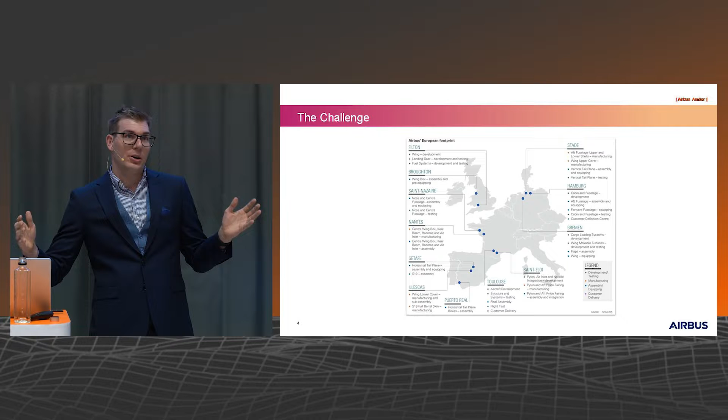Now, I really want to set some of the context for how large the scale of Airbus is. I don't actually know how many factories and plants we have, but I think it's about 40 to 50 all over the world, focused in Europe. I think we also have one for helicopters in Romania.

So the A320 is our most popular aircraft. On a typical month, we make something like 50 to 60 of these aircraft, and we ship all the parts around to our final assembly lines, one in the US. There's two in Europe, one in Toulouse, France, and one in Hamburg, and there's another one in Tianjin in China. And all of the parts for the aircraft are flown around.

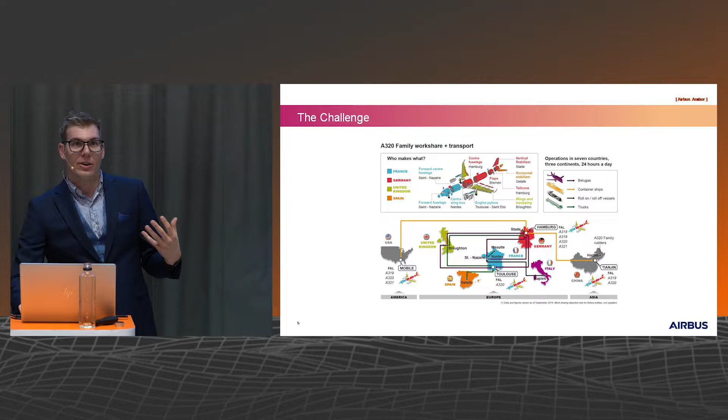The larger parts actually are so large they have to be flown around in a specialised fleet of aircraft. We have 6 of these Beluga aircraft, which are specially designed, specially modified aircraft made by Airbus for Airbus to transport the fuselage, the wings, the other components of the aircraft around Europe from, I think, 10 or 11 different places they fly.

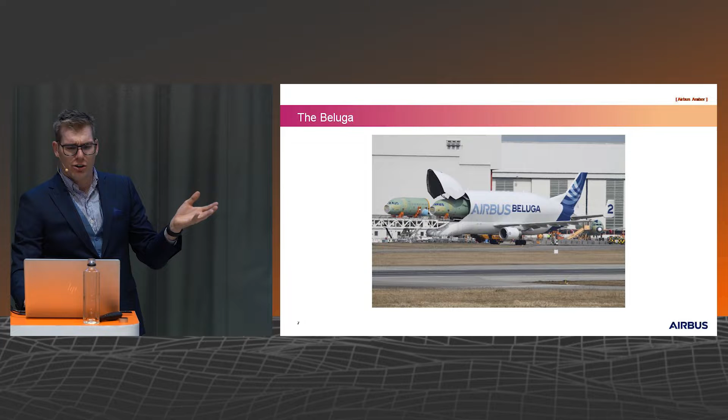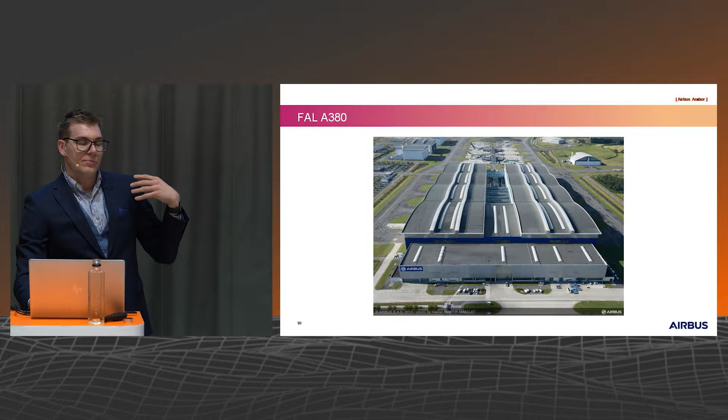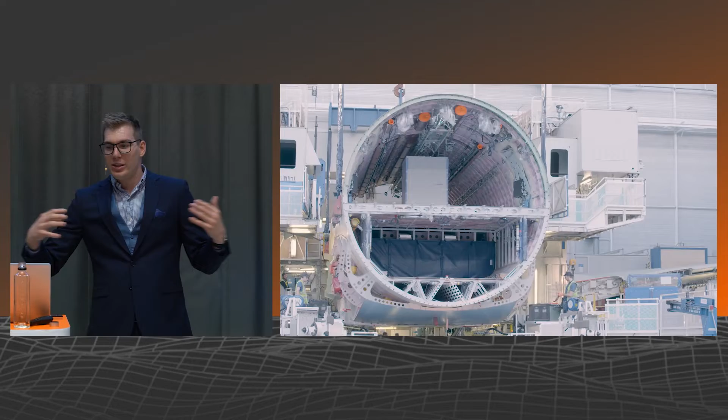So if I can get this video to play, I'll quickly narrate it to explain what's happening. Building a commercial aircraft is actually a lot like building an IKEA set, like a bookshelf, where you've got all these different parts, you have to unpack them all, you have to bring them all together, and hopefully in the right order in the case of IKEA, but definitely in the right order in the case of a commercial airliner. Trust me, you don't want to have parts left over, that's generally not very good.

Bring them all together and assemble the fuselage, which you can see here, but really this is the last 10% of how you build an aircraft, where all of the parts are coming together. And many of the parts we actually make within Airbus. So just pausing it here, because that's the end of the interesting stuff.

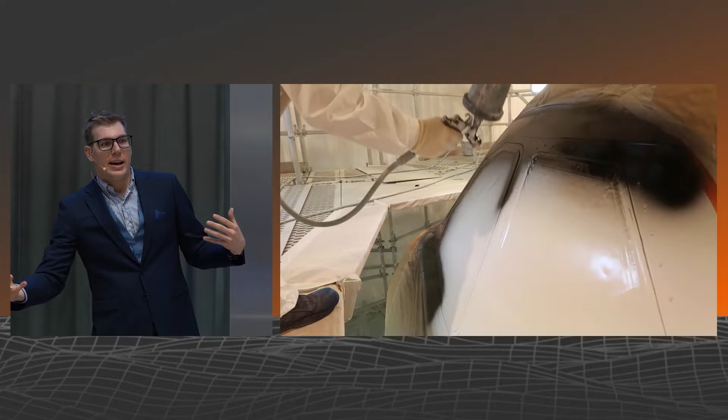Really, Airbus is a huge challenge. The last time I was in Romania was for Codiax in 2019, and this was before COVID, which was a very different world. And the challenge that Airbus had then was how quickly could we make aircraft. There's a huge demand from our customers for the aircraft we make, and we couldn't make these aircraft fast enough. COVID's happened, we're in a different world now, but our customers still want aircraft. Everyone wants to travel again, and the future looks bright, and I'm an optimist, but we're also faced with the challenge of climate change.

So not only do our customers want aircraft, they want more efficient, cleaner, greener aircraft. And these new, cleaner, greener aircraft obviously use a lot less fuel, which is great for the environment. And here you can see in terms of the actual volume of aircraft, we're being asked to produce thousands and thousands of these aircraft over the next couple of years. But in fact, when you go forward about 20 years, we need to produce about 40,000 new aircraft. So it's a huge volume of aircraft we need to manufacture.

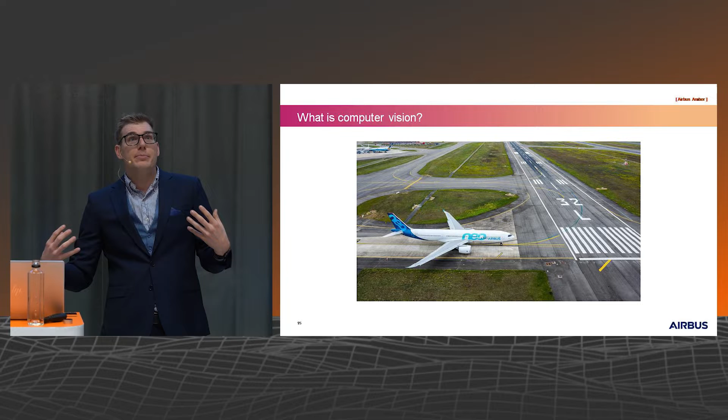Now, setting the context, what is computer vision? Computer vision is an incredible field. I've been studying it since I really started university, and it's evolved over the years. But fundamentally, computer vision is about how we can teach computers to see and understand the world. For humans, vision is our most important sense. It allows us to comprehend what's happening in the world around us, and we collect a huge amount of information.

And I'm not a neuroscientist, so I'm not sure if this statistic is right, but I was reading somewhere that something like 80% of our brain, probably not 80%, is responsible for actually doing the processing for what we're seeing. Anyway, a huge amount of our brain is to do with actually understanding and perceiving the world around us.

So in the case of a human, we can look at this image, and what do we see? We can very quickly and easily understand that there's an aircraft sitting on a taxiway. We can infer that it's probably about to turn onto the runway. We can infer it's probably about to take off. We can recognize that it's a runway, and on the runway we can read 32L, which is the name of the runway. We can see where there's the grass, so we can see lots of different things.

So this is actually a task called semantic segmentation, where computers look at an image, and on a pixel-by-pixel basis, they work out what's what. What's the aircraft, what's the runway, what's the grass? There's also other information we can get out of the image. For example, we could recognize the fact there's an aircraft and where it is. We could recognize the aircraft type. We could recognize the painting on the side of the aircraft and recognize that's a specific aircraft that belongs to Airbus. And we could also recognize the runway markings, all of these things.

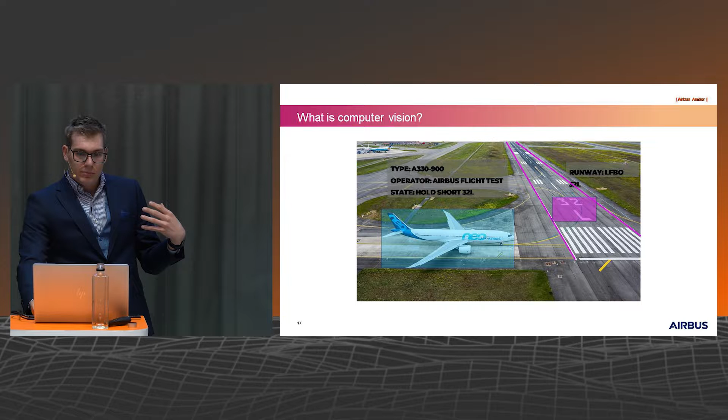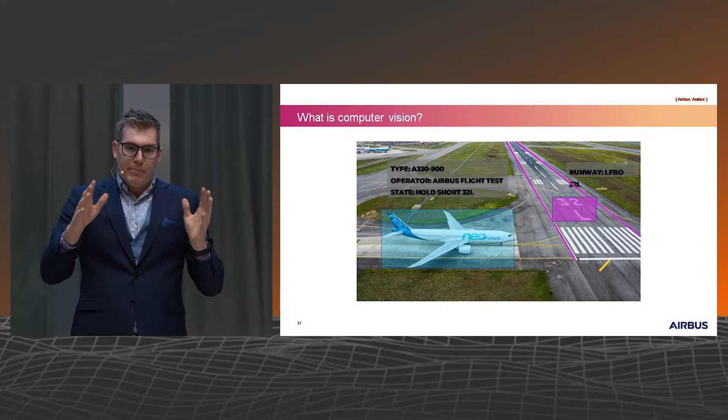Now, what's been the catalyst for computer vision? Computer vision as a field's probably been around for 100 years. Even before the advent of computers, mathematicians were studying how we could extract information from photographs. So you've got things like perspective, and they'd say, okay, we get a photograph and we can take measurements from it, and this field is called photogrammetry.

But really the catalyst for modern computer vision was the advent of deep learning, which maybe happened 10 years ago. No, 8 years ago. It's a very short time frame. I think even TensorFlow, which some of you may have heard of, a very famous deep learning library, is maybe 5 or 6 years old. The catalyst for deep learning was, firstly, access to huge data sets. There's a data set called ImageNet. I'm not sure exactly what year that came out, but that's less than 10 years old, I believe,

as well as GPUs. If you were here this morning, you would have heard from the speaker from NVIDIA giving a talk. GPUs really have been the catalyst that's helped enable these deep learning models. They're hugely efficient processors which are incredibly powerful and are able to do the computation very efficiently for training these very powerful, very complex, very sophisticated artificial intelligence models.

Now, I'm not sure how much everyone in the audience knows about machine learning and deep learning, but to keep things super simple, I'll explain it in 30 seconds. So basically, machine learning, deep learning: we've got an input data set, which is labeled. What we mean by that is, we might be trying to train a classifier to tell the difference between a cat and a dog.

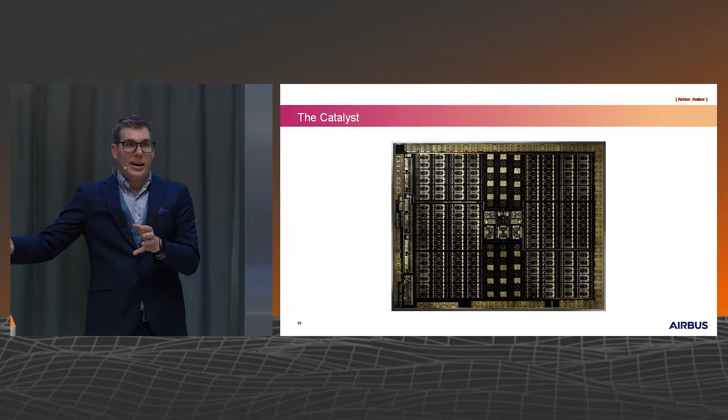So we've got lots of images with cats, lots of images with dogs. We tell the computer, here's a bunch of images with cats, here's a bunch of images with dogs. We've got a processor, like a GPU, which is specialized for deep learning. We've got a deep learning algorithm, which does the classification, and it's taught using this labeled data. This is a cat, this is a dog. So this works.

This is historically how deep learning has worked, this is what's called supervised learning. This is how it's worked in 30 seconds. Now let's turn to computer vision at Airbus.

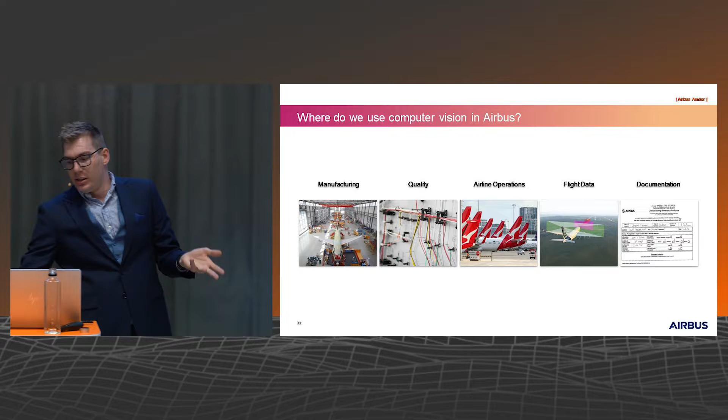At Airbus, we're using computer vision in lots of different areas. What I focus on is mainly manufacturing quality, but we also use computer vision for airline operations, for guiding aircraft. We're doing experiments with that, and also for processing documentation. Going into a little bit more detail, in the case of flight data, what I mean is that for future generations of aircraft, much like self-driving cars, we're trying to come up with algorithms that we can install on aircraft which will assist the pilots during landing.

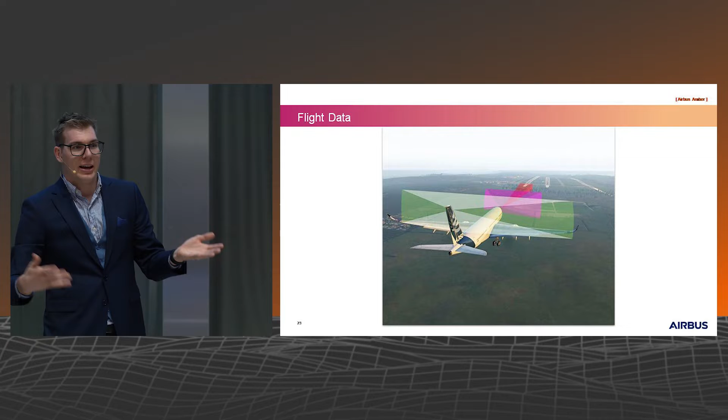At the moment, aircraft have auto-land, which uses GPS and specialised radio signals to guide the aircraft in to land. But in the future, we're hoping to use computer vision to help augment these, much like self-driving cars. Also for airline operations, we're trying to see how we could put cameras on aircraft to help the aircraft understand, when it's on the ground, what's happening around it. Things like, maybe the catering truck hasn't arrived, maybe the baggage wagon hasn't arrived, maybe the fuel truck hasn't arrived, to collect all this information for airlines.

But really what I want to focus on today is manufacturing, where we're trying to use computer vision to help us make better aircraft, to make them faster, to ensure we've got the highest quality. And that's basically the two topics: firstly the manufacturing process itself, but also quality. Working for Airbus, quality is paramount. There is nothing else that's important.

Building an aircraft is hugely complex. Before I joked about building an IKEA set, where whenever I built a bookshelf, there's always parts left over. Obviously for an aircraft, that's not acceptable. So when we build an aircraft, we've got a rigorous process where everything is inspected to make sure that we're not missing anything and that there isn't anything that isn't meant to be there that's been left on the aircraft.

Sorry, just give me one.

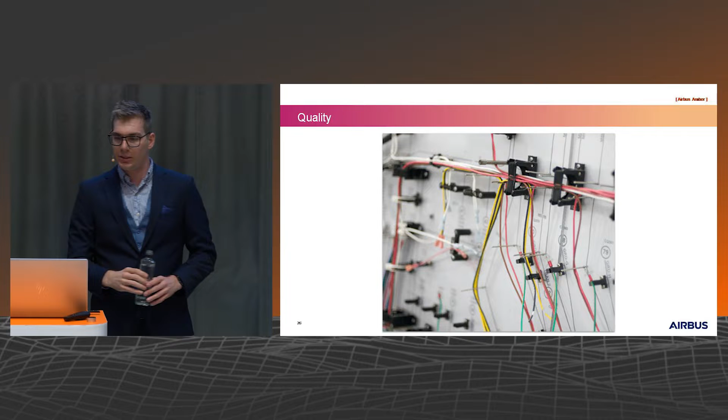Now, turning to the future. Airbus as a company, our customers are asking us for more customization. So what do I mean by this? When we make an aircraft, a lot of people think that's a bit like making a car, where, say, Ford or Hyundai or Toyota, I'm not sure what the numbers are, but they probably make 10 million cars a year. Airbus makes somewhere north of 500 aircraft a year.

Now, the challenge for us is that each aircraft is special in its own way. When a customer orders an aircraft, they want an aircraft made to their specifications with their options. So really, we're a lot more like Rolls-Royce, where customers will come and say, okay, I want that type of leather, I want these rims, I want this paint. With aircraft it's very much the same, where airlines will say, okay, I want these seats, in the cockpit I want to have this option.

For example, one option that we might offer is for the pilots, a USB charging port in the cockpit. This is something different where we need to run more wiring for that. They'll be different from any other aircraft. Other airlines might want in-flight entertainment of one brand, which means some kind of wiring, or they might want satellite internet, which is more wiring in a different place.

So very quickly, through customization, we end up with a situation where each of our aircraft is different, and when we're trying to do these inspections, this makes things very challenging, because it's not like we just make one aircraft and we memorize what it's meant to look like, and then we check against that. Because each aircraft we make is unique in its own way.

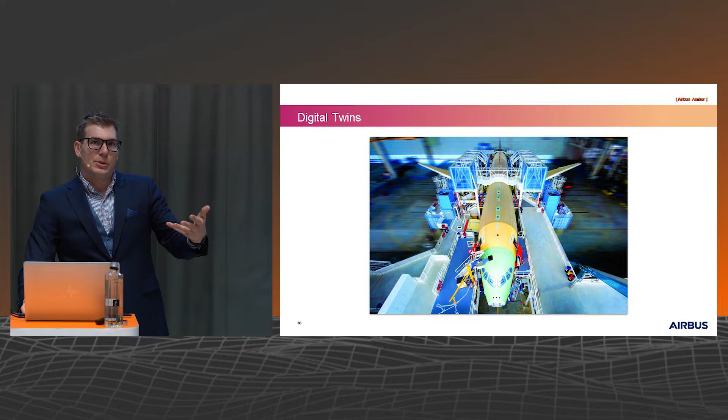So we've got digital twins and digital mock-ups of the aircraft, but what we want to be able to do is populate these digital twins with information about every drill hole, about every rivet. Airbus drills 100 million holes a year, and I'm probably going to get the number wrong. I think it's 10,000 holes per aircraft that we drill.

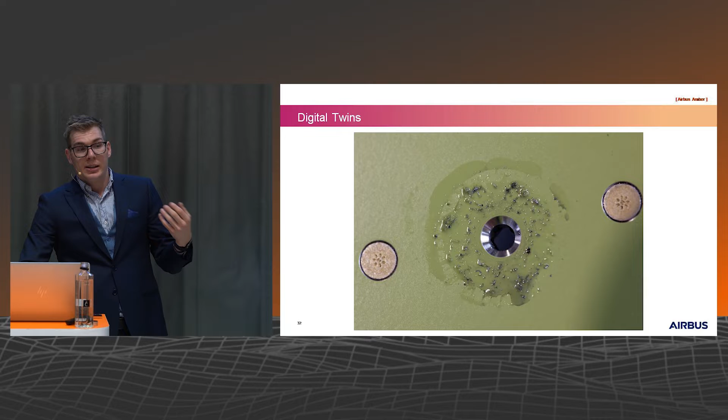So basically what we want to be able to do is to look at every single hole we drill. So if a drill bit starts going blunt and the holes it's drilling aren't as good as they could be, we know we can stop and change the drill bit. So really this is our aspiration: we want to be able to build more sophisticated aircraft using more modern technologies, and we want to know more about our manufacturing process.

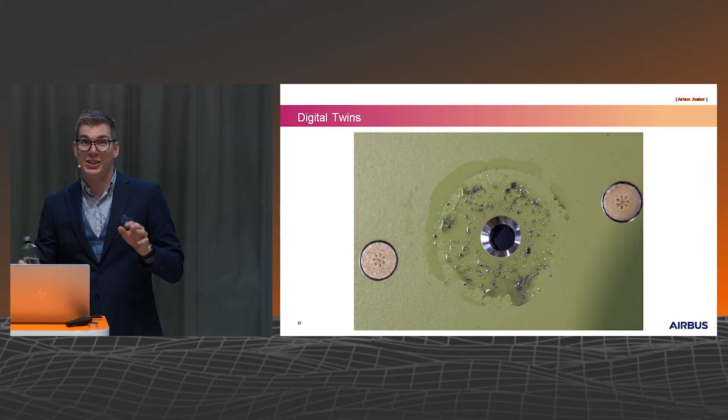Sorry, I think you can tell I'm pretty passionate about this, so I'm getting a little bit out of breath.

But now let's turn to challenges. In manufacturing, computer vision has been around for a long time, and there are some situations where computer vision works fantastically and is really easy to implement. An example of this: imagine we've got an assembly line with some circuit boards coming down it. Let's say you're making the iPhone.

I don't know how many iPhones they make a year, let's say 10 million, probably wrong, maybe it's 100 million, maybe it's a billion. But let's say 10 million. They're all coming down the production line, they're all identical. You've got a camera set up on top, and because you've got so much control of the situation, you control the lighting, they're all the same. All you need to do is take an image and then do a comparison between what you see and what you know you should see.

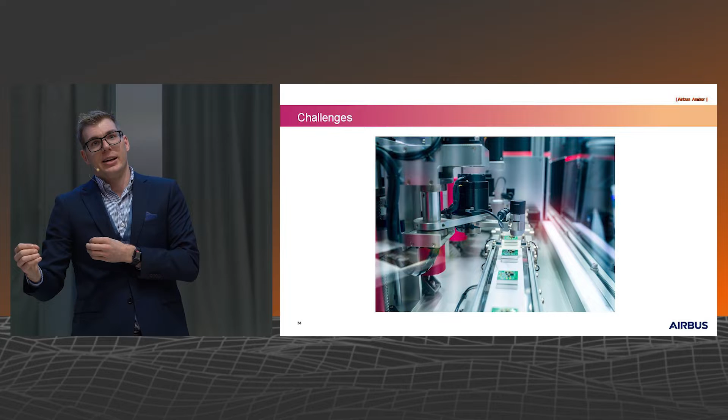This is the dream I'd love to have. Unfortunately, this isn't the case. The challenges that we face are around reproducibility and coverage. So what do I mean by this? If every aircraft is different, then in a lot of cases we can't just have a reference image for what we should see. Also, when we're trying to capture data, aircraft aren't coming down a production line. They're hugely complex. They're made in different stages.

They're made by workers. It's really artisanal. The comparison I make is, imagine Switzerland and the people in the workshop making Swiss watches, or Ferrari, where you've got people on their hands and knees doing the assembly by hand. It's really, really like that.

So we have a lot of challenges around capturing data. Even if the people on the shop floor have a camera and take a photo to do an inspection, there's really the question of what are we looking at, where are we? So there are all these different challenges. So the production line I described is the state of the world we want. It's not the state of the world we have.

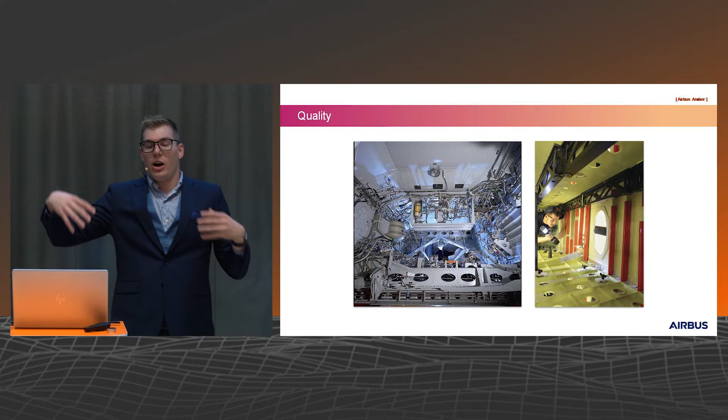So basically a git diff or a spell check or something like that, where we'd be able to systematically check for defects and anything that's out of order. We also need to do inspections not only in the manufacturing of the aircraft, but we need to do inspections on the cabin, the fuselage. So this is basically where all the passenger seats are.

If you've ever flown business class, I wish I had the money to fly business class. People have very, very high standards. It's very, very demanding. Everything has to be perfect. And when we're making an aircraft, it's much like if you were picking up your Ferrari. The leather seats would have to be perfect. So really, we've got this case where we're trying to automate all of these inspection processes to capture everything, to digitize it, and understand what's happening.

Also, when we've got aircraft that are in service, what we'll often have is people going around this fuselage of the aircraft. Aircraft can fly through hailstorms, they can hit birds. The aircraft skin can be damaged, it can be dented, there can be lightning strikes. So really, at the moment it's very manually intensive, where people will be out there with torches looking

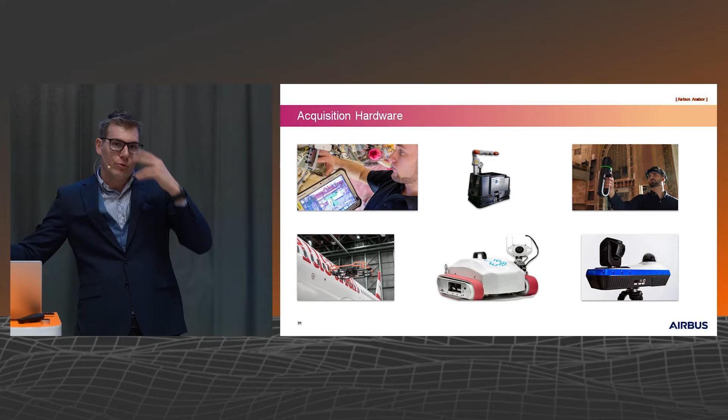for issues. And to capture all this information about what's happening on the aircraft, there's lots of different ways it can be done. At the moment, we've got people with iPads, for example, where they'll take photos of the work they've done. We've done some experiments with cobots. So the cobot is a robot that can move around on the factory floor with a camera on it. We've also done experiments using drones with cameras, and the drone can fly around the aircraft and do an inspection.

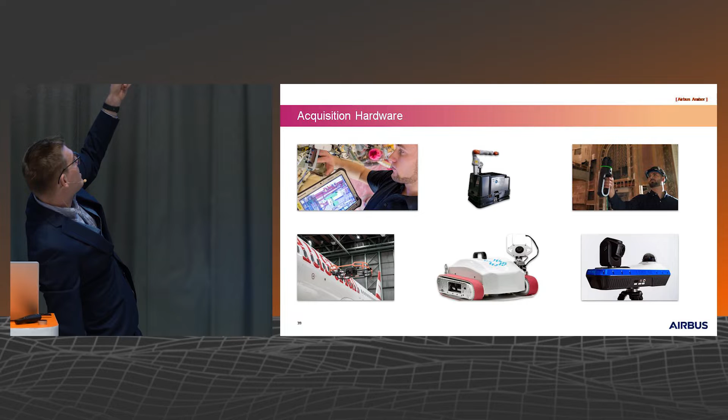As well as this thing, which is my favorite, in the bottom middle, which actually sticks to the fuselage of the aircraft. It can drive around the aircraft, and it sticks to the aircraft like a slug or a snail somehow, using suction. I don't know how it works, but it's very, very cool. So there's all these different ways that we can acquire imagery.

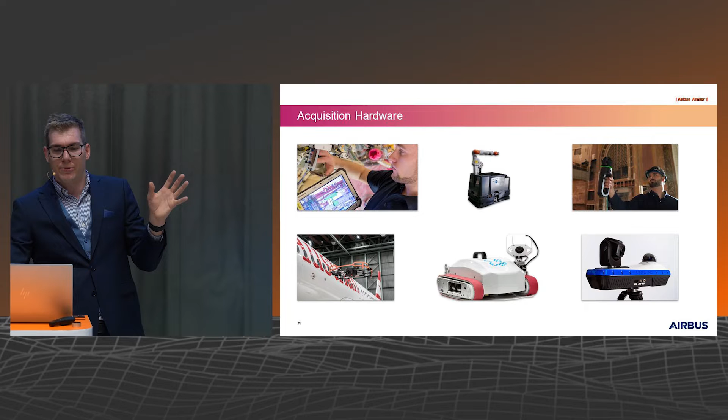Going back to what I said before, Airbus operates at a huge scale. We collect data from many different sources. It operates at a huge scale, huge manufacturing capacity. We're building lots of different things across the whole of Europe. So going back to the example I said with the iPhone, that's really the situation we want. But we can never have that because we've got so much diversity in terms of what we're making. It's not just a case of we can train one computer vision model, and that computer vision model can solve all our problems. In reality, we probably have to train 10,000 different computer vision models.

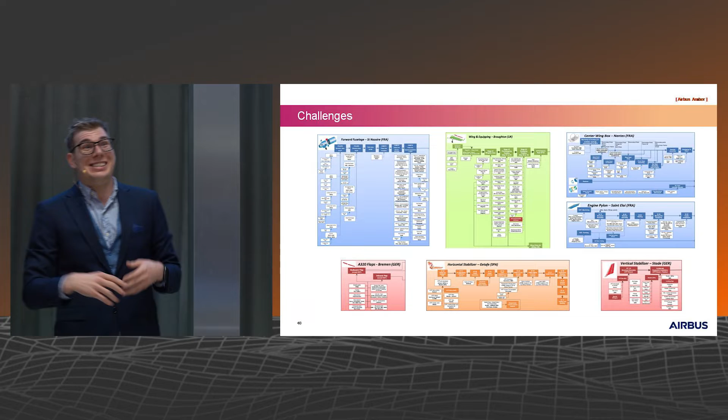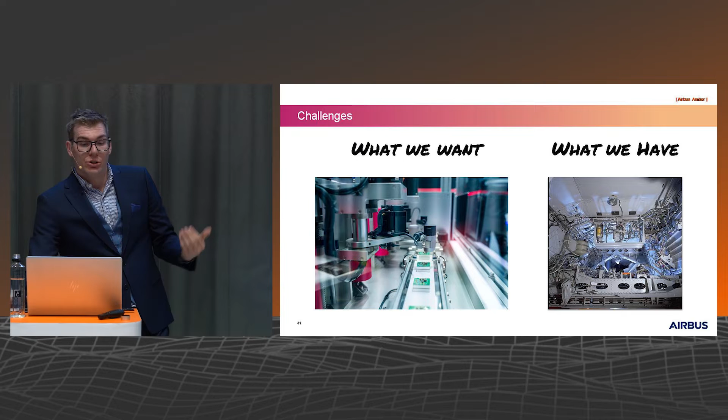So this is what we want. We want this production line, but in reality, what we have is the inside of an aircraft where someone's got a torch and they've taken a photo. But why do we want to do this? There's a huge number of different opportunities. Firstly, we can quantify for the first time defects. We can understand where they're occurring, how large they are. We can marry them back to our digital twins.

So for example, let's say that there's some part that goes from one factory to another, and we inspect the part when it arrives. We might find that there's always a dent on the lower left part of this piece of the aircraft whenever it arrives. And we might work out, okay, somehow it's being mishandled on the way from this factory to that one. So there's a lot of different opportunities to apply big data, to apply analytics, if only we had the data about how defects are occurring, how parts of the aircraft are being damaged. So there's a lot of opportunities around the actual analysis.

The worst thing that can happen is you put together your bookshelf and you realize there's some critical part missing and the thing just doesn't fit together and just falls apart. No matter how hard you push, it all falls apart because you've realized you're on step number 17, and on step number 2, you forgot to put some part in. So when something goes wrong, we want to find out as soon as possible what's gone wrong.

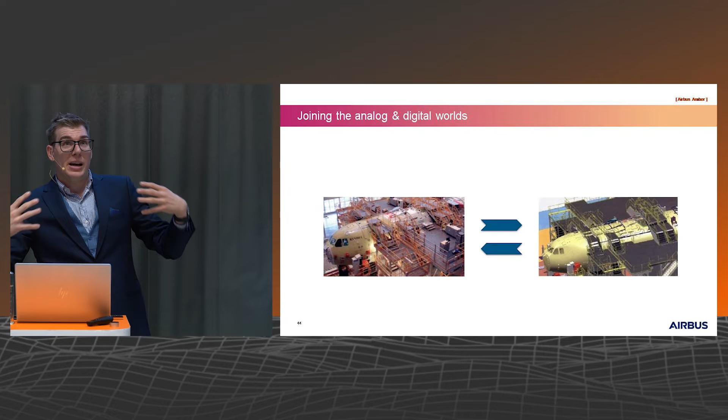So really what we need to do is we need to be able to join the digital and analog worlds. So the real world of what's happening in the factory and what's captured by cameras, and joining that with our digital twins, so our digital mock-ups of what's actually there on the shop floor. So in order to be able to join the digital world and the analog world, we need to solve a number of different problems using computer vision. We need to build a number of different models.

And then finally, robustness. When we're building these computer vision models, we need to be able to have faith that our models will work in practice and that we can trust them, because obviously we're in the aerospace industry, and trust is really important. We don't want things that probably will work 95% of the time. We need things that we can really trust and really rely on.

So now coming to the more technical part of the talk, why synthetic data? Before I mentioned that at Airbus we can't just build one model, we need to build 10,000 models. The problem is a lot of the time, to build 10,000 models, we'd need to build 10,000 labeled data sets. Now, I've annotated one or two labeled data sets. You've got a whole bunch of images and you sort them to cat, dog, things like that. If anyone here has done computer vision or deep learning, they know that doing this data curation, data annotation, data labeling is incredibly painful. I hate it, which is why I'm so interested in using synthetic data.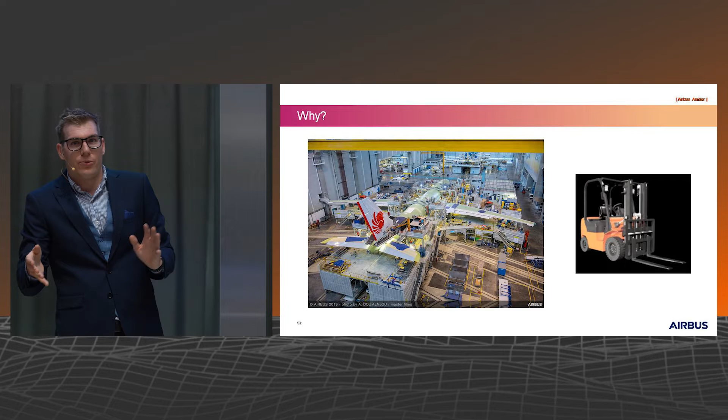Maybe giving a more concrete example. Let's say that we've got a camera that's watching the factory, and we want to know where forklifts are and where they're going. One way we could solve this is we could get someone to watch hundreds of hours of CCTV and annotate exactly where the forklift is in each of those frames. Or we could get a 3D model of a forklift, and we could generate a whole bunch of different renderings of the forklift in different positions.

But we also have a depth map, so we've got information about how far each pixel is away from the camera. We've got a semantic segmentation map, so we also know which object and what type of object each pixel in the image belongs to. So we already have all the training data we need.

And this is the beauty of using synthetic data: we can very quickly go away, generate the data we need for training a model, and then train a model. So this is incredibly powerful, especially if you hate labeling data.

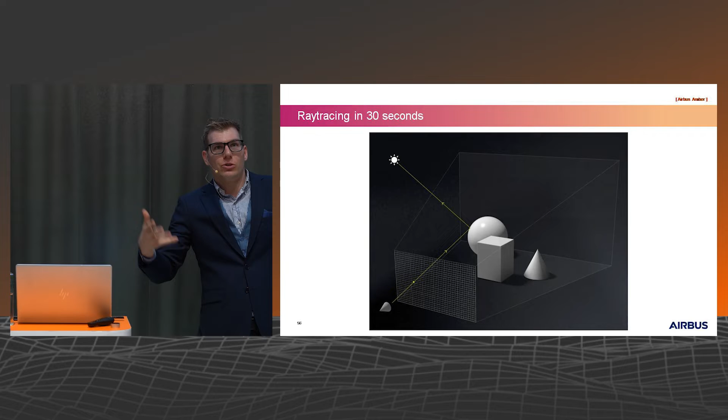Very quickly, I'm going to talk about ray tracing in 30 seconds. Ray tracing is the most powerful method of generating the most realistic images possible. Basically you do a physical simulation of how light moves through the scene. It's pretty simple. For each pixel in the image, you trace a beam of light from that pixel out through the scene until it hits something, and then you follow and see where it goes.

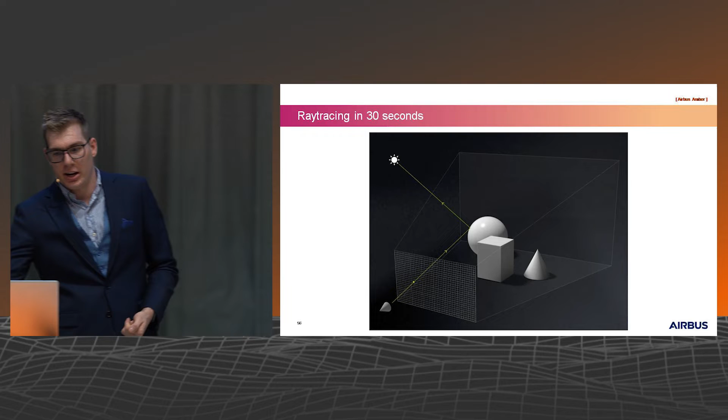At each point it hits something, you look at what the color of the thing it hit is. You do this a whole bunch of times per pixel, and eventually you end up with a beautiful image that's very, very realistic. It's basically just a physics simulation. You need a bunch of different ingredients. Firstly, you need lighting, because obviously, let there be light.

You also need geometry for the objects in the scene. Objects in the scene have different materials. Some objects might be glass, metallic, shiny, or rough and diffuse. And then finally, you need a camera. In terms of lighting, all these different ingredients are freely available. When we're training computer vision models, we want to make sure that they're robust to real-world environments.

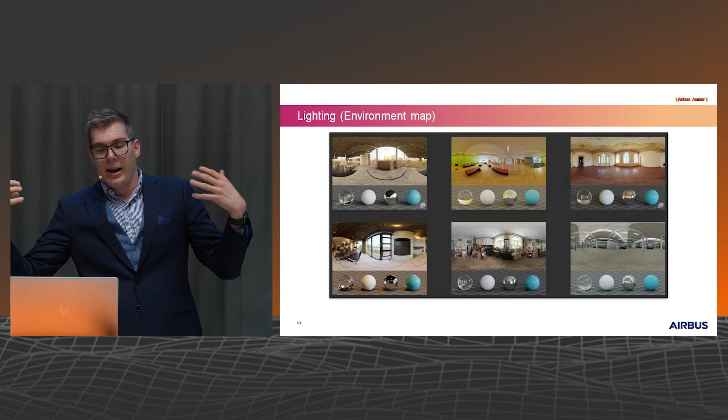So one of the things you can do is use what are called environment maps. Some people have, very helpfully, captured the lighting from real-world environments, like this theatre, and made them public domain, open source, and available on the internet. So every time you render your scene, you can use a different lighting map which represents the real world, so that your scene can have realistic lighting.

You also need geometry and meshes for the different objects. In the case of Airbus, we have access to very intricate, very precise geometry of the aircraft because it's designed using CAD. So we can use this information for helping us to train our computer vision models.

If you don't work for Airbus and don't have access to this CAD data, and you want to train for some more real-world things, there's a great dataset, I found out this afternoon, available from NVIDIA where they've made freely available to individuals a whole bunch of different assets which you can freely use. This is through the NVIDIA Omniverse.

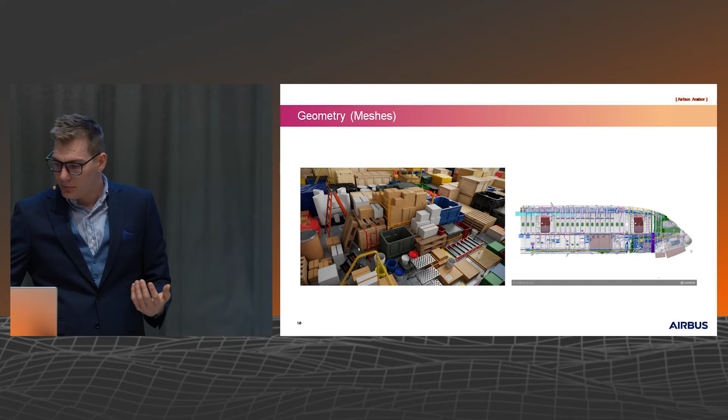And you also need materials. So basically, as I mentioned before, different objects, different surfaces, the light interacts with them in different ways. You've got materials that could be shiny, metallic, glassy, glossy, whatever. Then you also need a rendering engine. The great news is that everything I've mentioned up to and including this point is either free or open source.

So there's a lot of different rendering engines. The rendering engine is the software which actually does the simulation. At Airbus, we're currently doing experiments with a number of different engines, but my personal preference is one called Blender, which is free and open source.

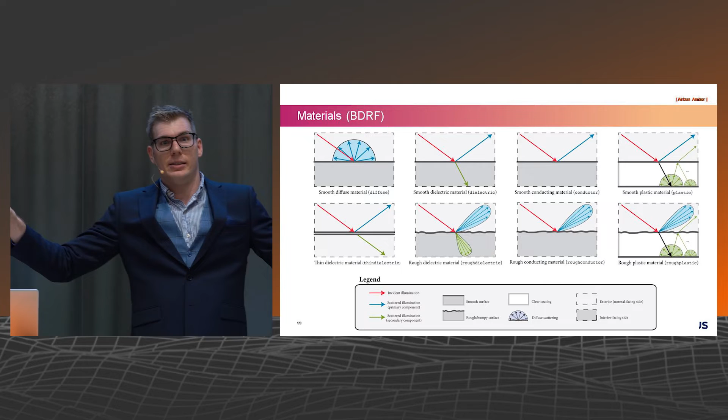So we've got all of these different ingredients for generating realistic synthetic data. We've got materials, we've got our meshes, we've got our rendering engines, we've got our lighting. And the challenge is how you can bring these all together. And the great news is that NVIDIA's developed this really interesting piece of software called Omniverse.

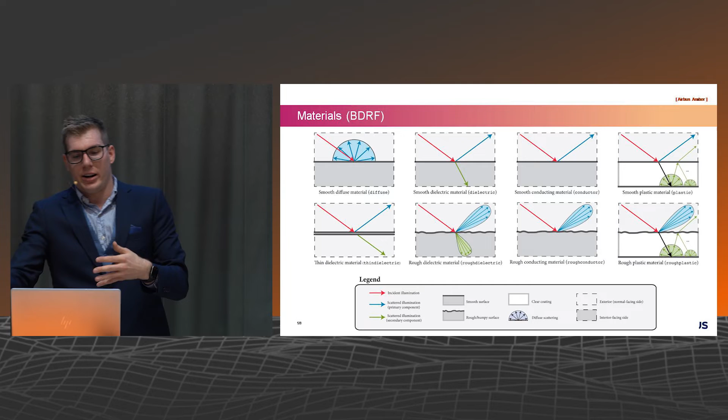Now, I'm not the right person to talk about this. We had the talk this morning by Karania, which is fantastic, talking about NVIDIA Omniverse, which is a suite of software or a library or an ecosystem of different software where you can plug in your modeling software, you can store all of your assets, and then use NVIDIA's renderer. So really what you're doing is you've got all of this representation of a scene in software, and then you're generating rendered images.

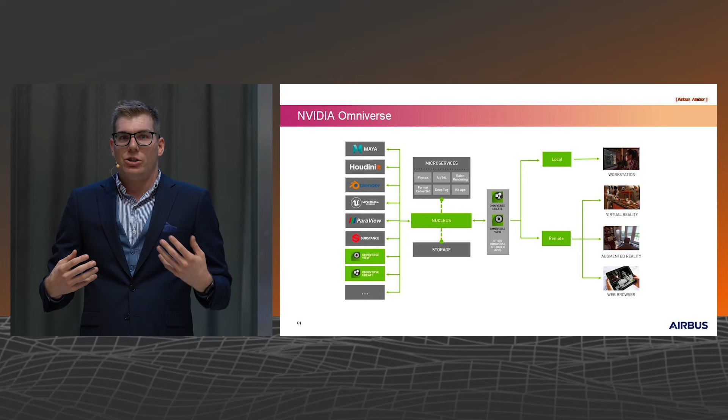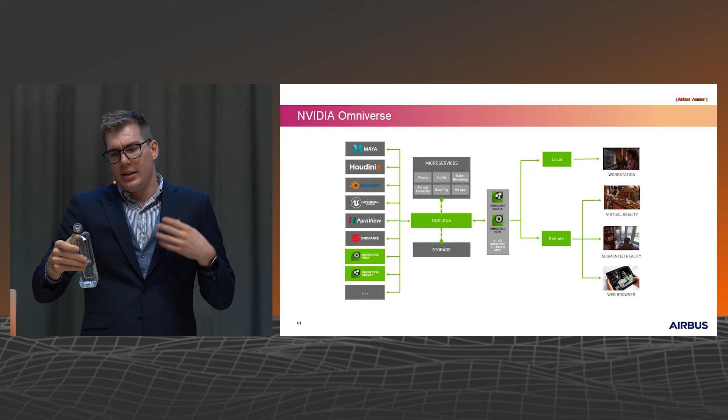Now at the moment, everything I've talked about has been what the state of the art is, where we are really at the moment, what concretely works really well. But still there's challenges around, okay, this sounds great, but how do we capture the objects, the meshes to train our models? Let's say, for example, that I wanted to train a computer vision model to detect this glass of water. There'll be the question of, okay, that's great, so I need to go away, I need to build the mesh of it, I need to get all the materials, I need to do all these things. That's pretty challenging. But the great thing is that at the moment there's some really exciting breakthroughs in technology.

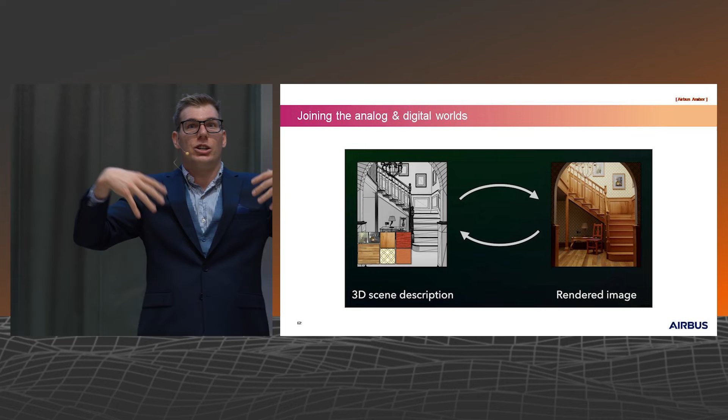So for example, there's a new set of algorithms called NeRFs, which some of you may have heard of, which is basically where you can take a bunch of photos and you can generate a representation of a scene. And this really is as easy as capturing a whole bunch of different photos from different angles of an object. There's also other things

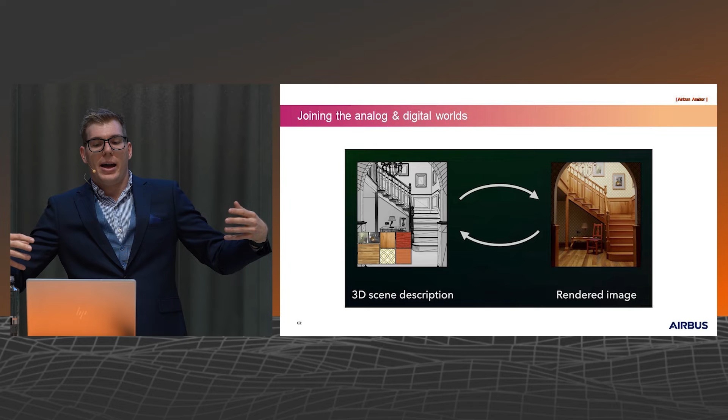where you can even go away, and maybe some people have heard about some algorithms called Stable Diffusion. So this is basically where you can describe a scene and you can get a representation of it. So there's lots of new algorithms, lots of new technologies, which I think is really exciting for the future, that's really going to make it so much easier to be able to get the assets that you need to use synthetic data.

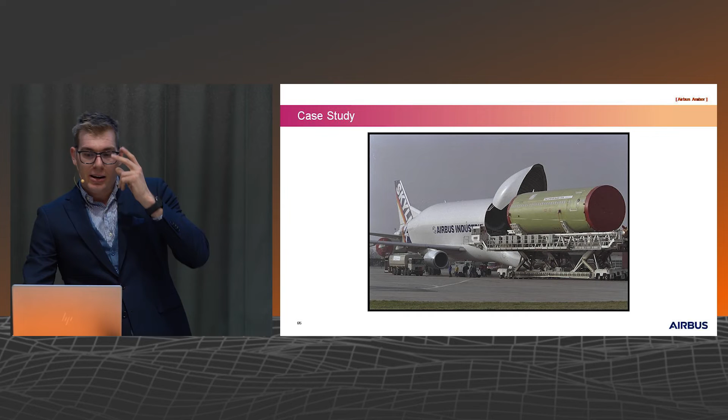Now, to finish up, I just want to do a case study on dent detection. So this is something we actually did at Airbus to solve a real-world problem. Now, aircraft are made of these fuselage sections, they're made of aluminium. And what happens is when the aircraft is in service, like I mentioned, you could have like hailstorms, or a truck could drive into the aircraft, or lots of different things can happen, and you end up with a dent in the aircraft.

And what we wanted to do was to develop a drone system which could fly around the aircraft and look for dents on the surface of the aircraft using deep learning. So originally, when some people had this idea, they're like, okay, this is great. What we'll do is we'll get a section of fuselage we found lying out the back of Airbus. This is 100% the truth, which looks something like this, where they found some section of aircraft.

And they're like, okay, let's get this piece of aircraft, and well, we need to detect dents. So what we'll do is we'll go and deliberately dent this section of aircraft using hammers. So you have this section of aircraft, which is probably worth, I don't even know how much, €1 million, let's just say, where we've got one, it's for testing, but we only have one. So they went to put some dents in it, and there's maybe 10 dents in it.

And they went away, they built their computer vision model for detecting dents. It works great. Now, if anyone knows anything about machine learning, you've got your test set, you've got your train set, you've got your validation set. And they went away and they put another dent in, and it didn't work great.

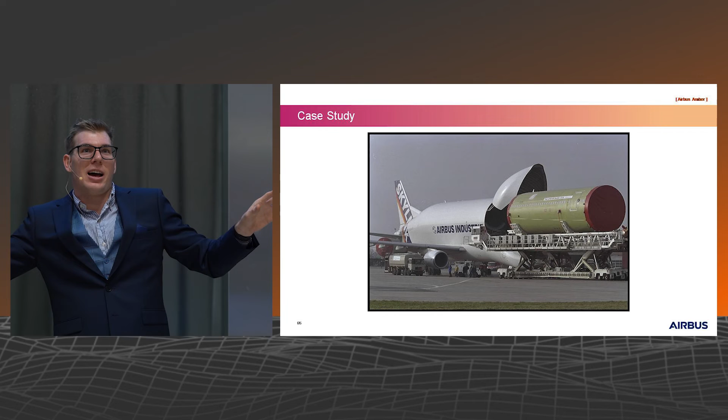It didn't work at all. So they've built this incredible model which can detect 1 of 10 different dents. At which point they're like, okay, we have a problem, because we had this single piece of fuselage which we put the dents in, and now obviously we need a lot more dents, and this is not scalable. We can't just get more pieces of aircraft to go and put dents in it. So that's when they came to me.

And what we did was we used some open source software called Blender. Well, the first thing I said to them is like, this is a fantastic problem. This is a great case study. Clearly, it's ridiculous. You can't. This is a beautiful example of how we can use synthetic data. Now, the great thing is everything we did uses open source software, so you can follow along at home.

Basically, we used open source software called Blender. Now, Blender is completely open source, and I love it because it's completely controllable through Python. So basically, we used Blender, and we used a tool called Blender CLI rendering, command line interface rendering, where basically what you can do is you can write Python scripts that can define scenes and then render them.

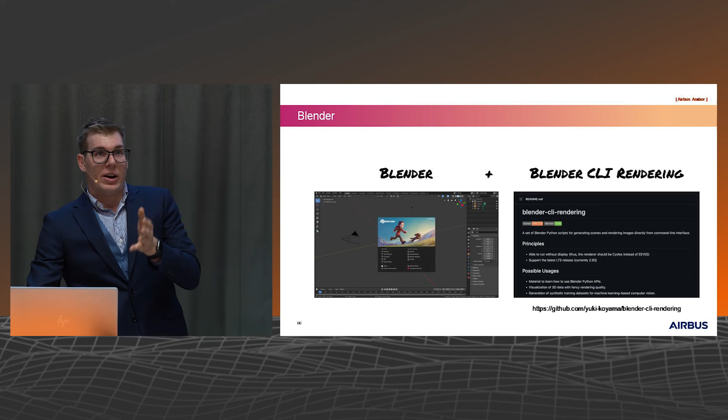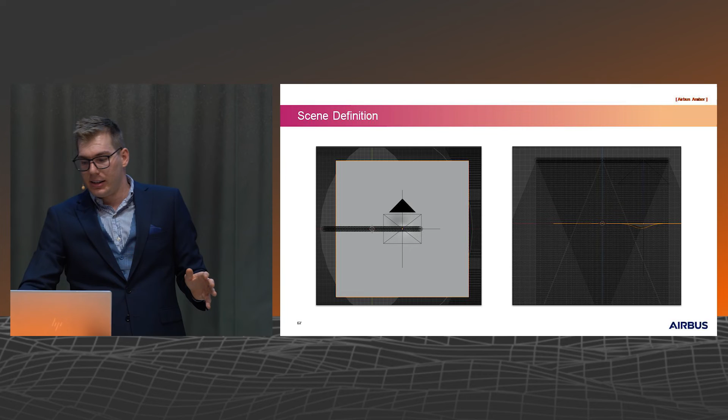Then we can define different materials. So for example, what we can do is we can say, okay, what if the surface of the aircraft is glossy, what if it's less glossy, what if it's more faded, what if it's this color, what if it's that color. So we can go away, we can define all of these things programmatically, and we can generate incredibly realistic synthetic images.

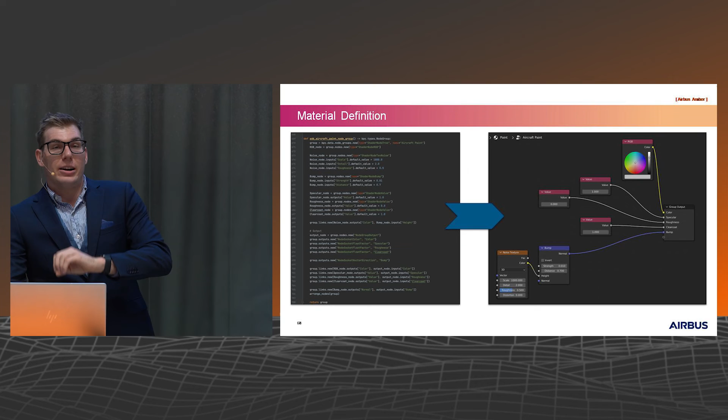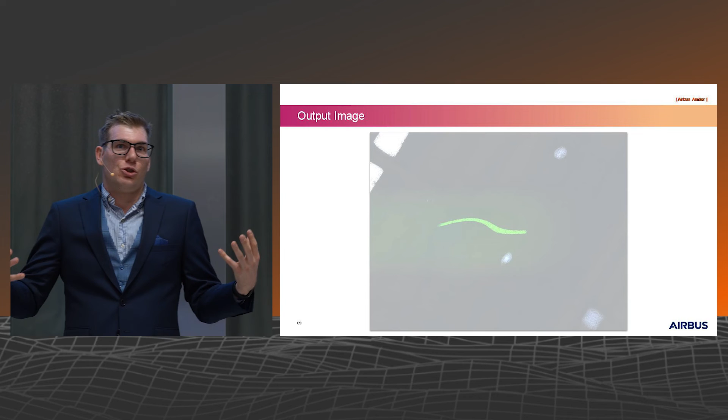And honestly, if I was going to do some annotation, I'd probably annotate 10 images in an hour because I'd probably get bored after the first 5 minutes and go and have coffee. But with the software, it can sit there, churn out 10,000 images, and we end up in a situation where we've trained completely on synthetic data, validated on our real-world data, which was the aircraft section we've dented, 100% precision, 100% recall on a sample size of 11, but still very, very happy.

Now, one final note. The reason why I love synthetic data so much is that it's incredibly powerful. As I mentioned before, we're trying to come up with systems that we can put in aircraft that can help improve the safety of flight, especially with landing. Now, last year, something completely crazy happened, and people swear this happened. I've tried to find actual information or actual photos to be sure this happened, but allegedly in India, there's a situation where some elephants got onto the runway of the airport.